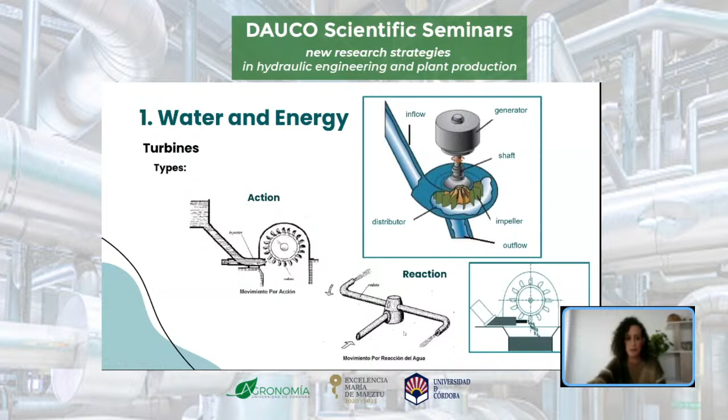Por otro lado, aquí os enseño la turbina Pelton. En este caso hablamos de una turbina de acción diseñada para grandes saltos de agua y para caudales relativamente pequeños. Y finalmente la turbina Kaplan es una turbina de reacción de flujo axial empleada para saltos de altura no muy grandes, pero sí caudales mayores.

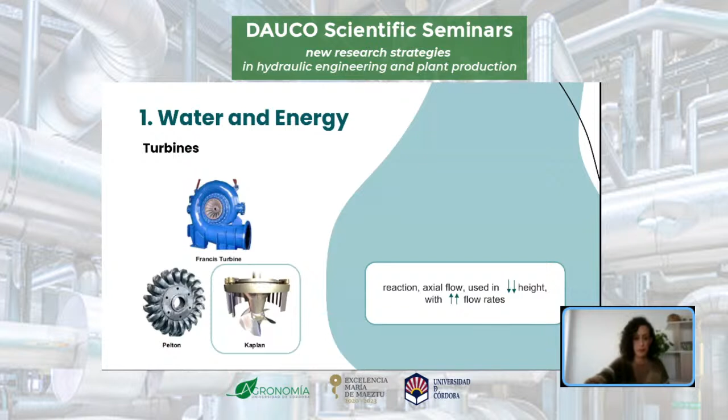Cuando hablamos de la microhidráulica, no solo nos quedamos en las turbinas concebidas como tales, sino que cada vez es más común el uso también de bombas funcionando en reversa. En el caso de una bomba funcionando en reversa o una bomba como turbina, conocida con las siglas de PAT, de Pump as Turbines en inglés, vamos a invertir el proceso habitual de funcionamiento de una bomba.

Entonces, en lugar de seguir este proceso que os indico aquí a la derecha de la diapositiva, en la que un generador alimentado bien por electricidad o por combustible fósil va a desembocar en el movimiento de rotación de una turbina que a su vez va a causar esa impulsión en el agua, cuando usamos una bomba en reversa o una bomba como turbina, es la energía del agua la que se va a transferir a un movimiento de rotación del rotor que finalmente va a hacer que podamos generar esa energía eléctrica.

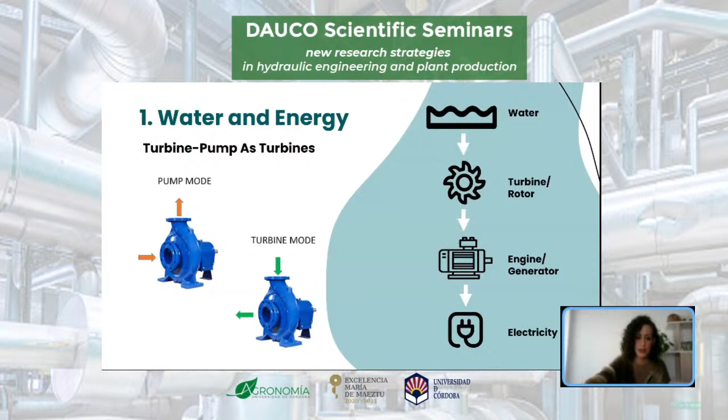Con toda esta capacidad instalada, la energía hidroeléctrica en el mundo representa alrededor de un 19% del total de la producción eléctrica mundial. La mayor parte de esa producción eléctrica debida a este tipo de energía es debida a grandes instalaciones, por supuesto.

Sin embargo, en el caso que nos ocupa hoy, hablamos de pequeñas instalaciones hidroeléctricas y estas responden a aquellas que tienen una potencia o capacidad nominal inferior a los 10 megavatios. A su vez, cuando la capacidad instalada en una pequeña central es inferior a 1 megavatio, hablamos de mini hidráulica, microhidráulica cuando es inferior a 100 kilovatios, y pico hidráulica cuando es inferior a los 10 kilovatios de potencia nominal.

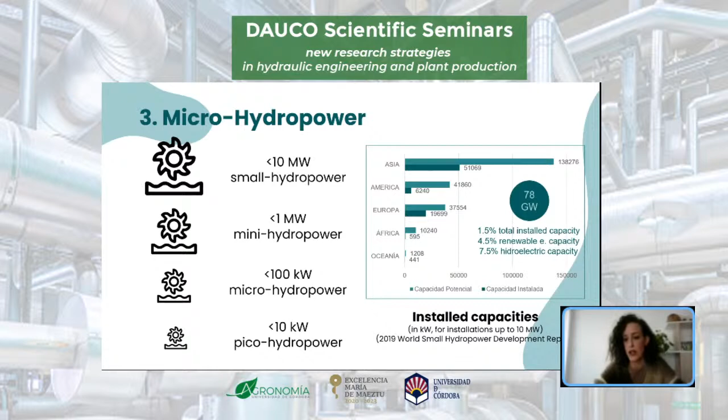Estos 78 gigavatios de capacidad instalada representan un 1,5% del total de capacidad para la producción de energía, un 4,5% si solamente consideramos las instalaciones de energía renovable, y un 7,5% de la capacidad total en relación a la producción de energía hidroeléctrica.

Cuando hablamos de recuperación de energía, bien sea en redes de distribución de agua a presión o puede ser también aprovechamiento de saltos de agua. Pero cuando hablamos de la recuperación de energía en redes de distribución de agua a presión, a grosso modo lo que vamos a hacer es aprovechar sobrepresiones que ocurren normalmente en localizaciones concretas de esas redes de tuberías y transformarla en energía aprovechable.

Normalmente en estas redes, por ejemplo, si pensamos en una red de una comunidad de regantes, estas sobrepresiones se alivian por medio de la instalación de válvulas reductoras de presión. Estas válvulas reductoras de presión son dispositivos que permiten que una presión alta, agua arriba del dispositivo, sea transformada en una presión menor, agua abajo, y además controlada en el tiempo.

Sin embargo, aunque aquí estamos aliviando a la red de esa sobrepresión que podría terminar en rotura y fugas de agua, no estamos aprovechando esa energía en forma de sobrepresión. En este caso, con la alternativa de la instalación de pequeñas centrales de recuperación de energía, lo que se propone es instalar en estos puntos de sobrepresión una pequeña turbina o PAT para aprovechar esa sobrepresión y transformarla en energía útil.

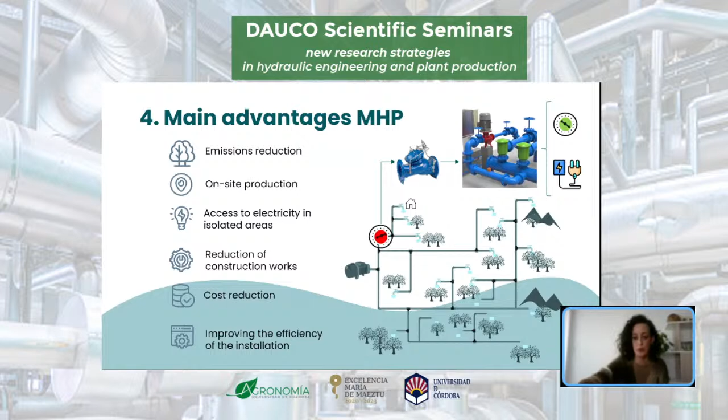Otros trabajos se centran en el desarrollo de modelos para la selección óptima de turbinas o PATs de acuerdo a variables como el caudal y la presión y su evolución a lo largo del tiempo. Otros modelos trabajan sobre la predicción de esa recuperación de energía, los costes de los equipos, siempre vinculados a esos caudales y presiones disponibles, y análisis de ciclo de vida, entre otros.

Dentro de todas estas líneas de trabajo se enmarcó el proyecto REDAWN. Este fue un proyecto que finalizó el año pasado, en 2021, financiado por la Unión Europea, en concreto por una convocatoria del área atlántica. El objetivo del proyecto REDAWN era tratar de mejorar la eficiencia en las redes de distribución de agua mediante el uso de esta tecnología microhidráulica, considerando dentro del sector del agua los sectores de agua potable, tratamiento de aguas residuales, la industria con un uso intensivo de agua y el riego a presión. En este proyecto colaboraron 15 socios distintos de 5 países, y entre el equipo de trabajo formaba parte tanto el equipo de Aonghus de Trinity College Dublin como el departamento de agronomía con el área de hidráulica y riego de la Universidad de Córdoba.

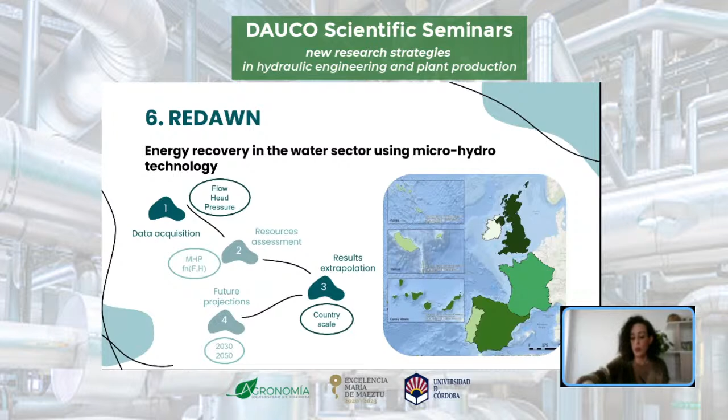La estimación del potencial de recuperación de energía se basa principalmente en esta ecuación que os muestro en pantalla. En términos de potencia, esa recuperación de energía dependería tanto del caudal como de la altura de presión disponible. Evaluados esos potenciales de recuperación de energía en las distintas instalaciones, se determinaron una serie de ratios y correlaciones.

En el caso del sector del agua potable y de la industria, se hizo un ratio con el potencial obtenido para las instalaciones con respecto a la población a la que suministraban las mismas. En el caso del sector de las aguas residuales, se obtuvo una correlación lineal en función de esa población abastecida por las distintas plantas analizadas. Y en el caso del sector del riego, el potencial obtenido para las redes analizadas se relacionó con el área regada por las mismas.

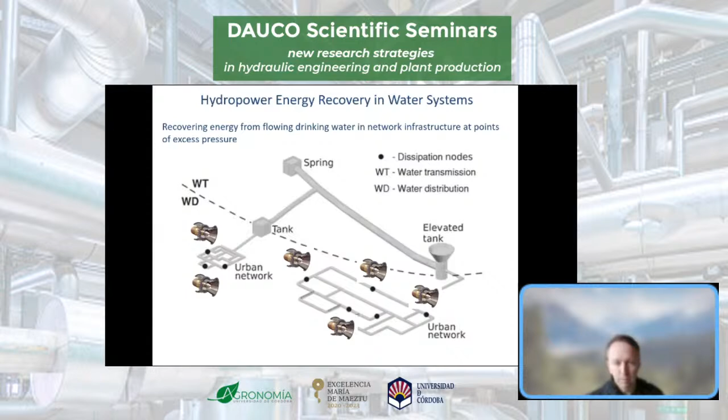Now, the problem with trying to address the distribution network with hydropower is that the amount of power is much smaller. So we need much smaller turbines than those that already exist on the transmission side. And conventional machines don't work in that setting. They are too large, too expensive, and cannot deal with the very large variation in flow rate, which is worse still when you go to irrigation. So we needed to come up with some new technology, and that was really the nub of the problem.

So my next slide is more or less illustrating that hydropower has existed for a long time. You can see in the photo a picture of me and a caretaker of a water treatment plant inspecting a very old and no longer used turbine from the 1940s in Ireland. That turbine was producing about 5 kilowatts. You can see that it is belt driven. I'm kind of leaning over the belt drive, a Pelton wheel.

This is installed at the inlet to a treatment works in the Dublin Mountains, close to where I am now, and was providing enough power for the caretaker's house at the time. From the 1940s to the 1970s, it operated. And in fact, a turbine existed there which predates that one, which is no longer in existence now. And that 5 kilowatts was enough to power the caretaker's house.

But at some point, Ireland in the 70s joined the EU, and our energy requirements for water treatment became larger than 5 kilowatts. So it was no longer really viable to keep up the maintenance of this turbine, so it fell into disrepair. Sometime later it was replaced with a modern turbine which produces 90 kilowatts, of which 30 is consumed for the treatment process, and the rest goes to the grid.

Examples like that are in existence, and that's in the transmission network. We can buy conventional hydropower turbines, and they will work there quite well, and no real research or development is required. The other side of it is that the distribution network contains much more potential than the transmission network, but conventional turbines, as I said, don't work in that setting. So we need another solution. And the variability of the flow in the distribution network is also an issue.

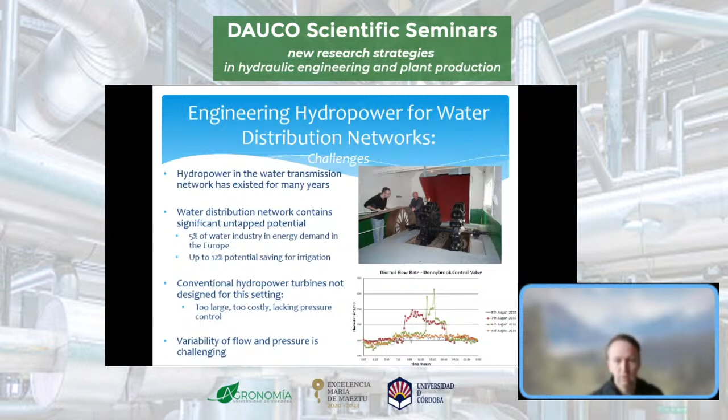The time series graph of flow there is from a pressure reducing valve in Dublin city centre, occurring during a particular event, which gives us plus or minus 50% of the normal flow. So no turbine could really cater for that.

Then if that resource was worth exploiting, we wanted to see how we would do it, because we had identified that we need some other kind of turbine, particularly low cost, as the present cost was just not viable. And following on from that, what was the long-term performance of these devices working in the field? A number of projects funded by various EU instruments have looked into that.

The first one was called HydroBPT, started back in 2011. REDAWN was also there, mentioned by Ida already. And we also have a Dŵr Uisce project, which ends next June. Those projects involved answering the questions above, and I'll give you some examples of some of the answers. Again, Ida touched a little bit on the resource part.

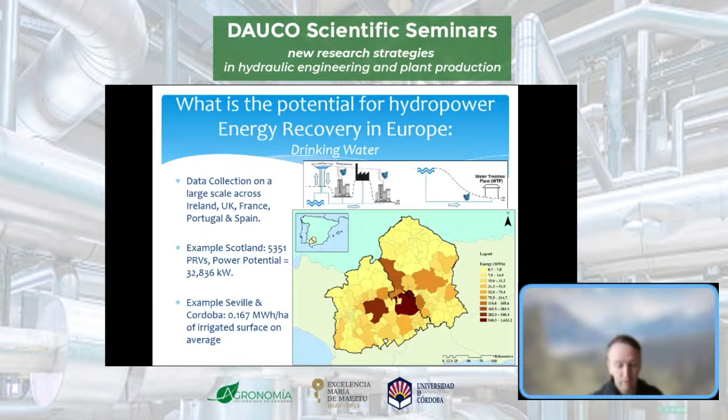So having done that right across Europe, and I'd already mentioned we did it in several countries across Europe, altogether was over 8,000 different sites. We moved on to, well, how could we exploit this using a specific technology, the pump-as-turbine, which again I'd already mentioned. So that work was also happening more or less in parallel. So there were some advantages with using the pump-as-turbine. Similar to hydropower in water networks, the idea of using a pump as a turbine has existed for similarly around 100 years, discovered by accident in testing pumps.

And so it has a number of advantages of why we might use a pump: it has compact dimensions, it is mass manufactured as its main advantage here, that due to mass manufacture, it's 5 to 20 times less expensive. It's a short delivery time and is easy maintenance. And people involved in water networks are used to dealing with pumps. They know how to maintain them, even when they're operating in reverse.

Now, it has a number of disadvantages, that it has poor part load efficiency, which means that when the flow rate deviates from its best efficiency point, it rapidly drops its efficiency. There's a lower peak efficiency compared to a conventional turbine. And there are a number of barriers to how you might use it. So there is a lack of information on how a pump operates in reverse as a turbine, and that creates a risk to investment for designers and site developers. And so because of those things, hydropower using pump as turbine hadn't seen very many examples of exploitation up until more recently. And there are a variety of reasons for that.

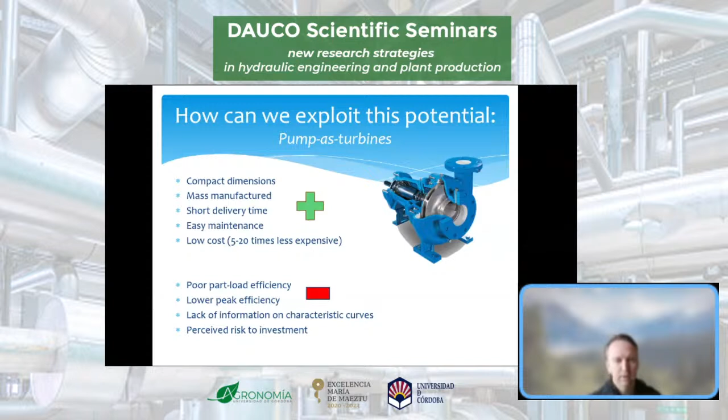So there are a number of ways in which you might be able to try and convert the pump's information into turbine mode. One is using a number of 1D analytical methods, 1D conversion indices, to get the best efficiency point in turbine mode from pump mode, or else using CFD analysis, which is creating a 3D model of the geometry of the pump, using CFD software then to predict how it behaves in reverse. And then the final part, I guess the best method, is experimental measurement, taking the pump, operating in reverse and measuring the characteristic curves.

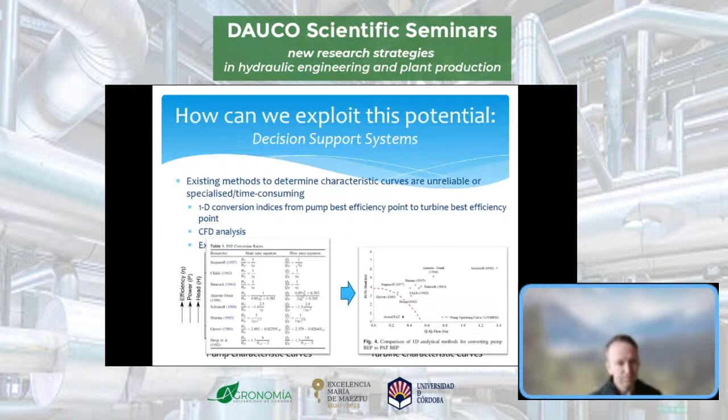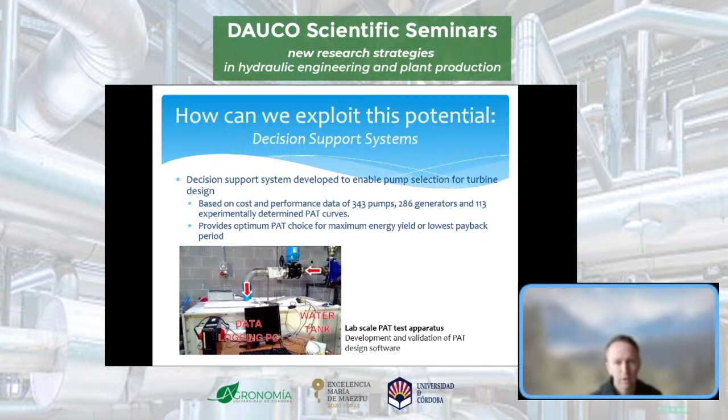So I am sort of rushing through the method of all of this. There are a number of publications behind it which have a lot of detail in them. You can find those later, but the actual process of doing this involved building a custom-built pump as turbine testing unit. The kind of dark blue color there in sort of the top right of the picture is an actual PAT being tested in reverse, measuring its curve and doing that for a lot of data to produce a set of curves, as you can see here.

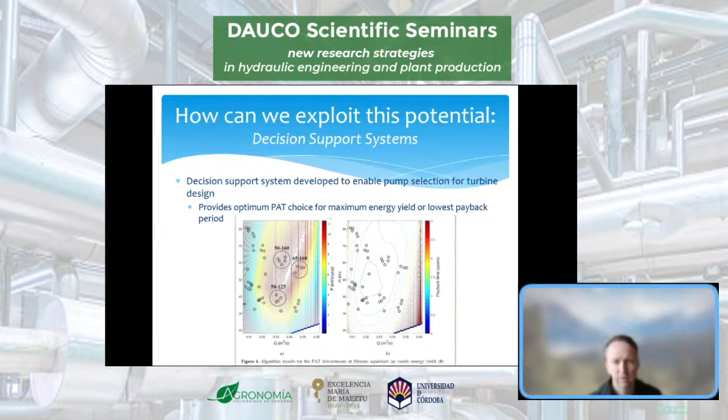So there is a number that are close to it. And so the software kind of links the theoretical best location for the efficiency point to what is available from the market. That retains then the low cost. Like I said, this was demonstrated then in a number of sites. In drinking water was the first, also in irrigation, Aida already mentioned, but also in a variety of other places.

And the most recent one is in mining, as you can see in one of the largest zinc mines in Europe, which happens to be located in Ireland here. A variety of different processes using water and happening to have excess pressure at different points. And so the purpose here of this was to test out that the software actually worked to predict the correct power outputs and then test that in the long term.

So for example, for the drinking water network, this is at Blackstairs Water Treatment Works in Ireland, where we have the inlet to a treatment plant. That little blue turbine produces about 4 kilowatts. So it's quite a small turbine, but that's enough to produce 25% of the energy needs of that works. So it doesn't require an awful lot. And the value of that, of course, has increased a lot with the inflation of energy prices recently.

So you can see on the right there the amount of power produced, kilowatt hours over 2019, 2020. It kind of dipped in the summer there, as it operates from a river source in a mountainous region. And during dry periods, the amount of water available from that source goes down, so the power also drops. But the turbine works very well.